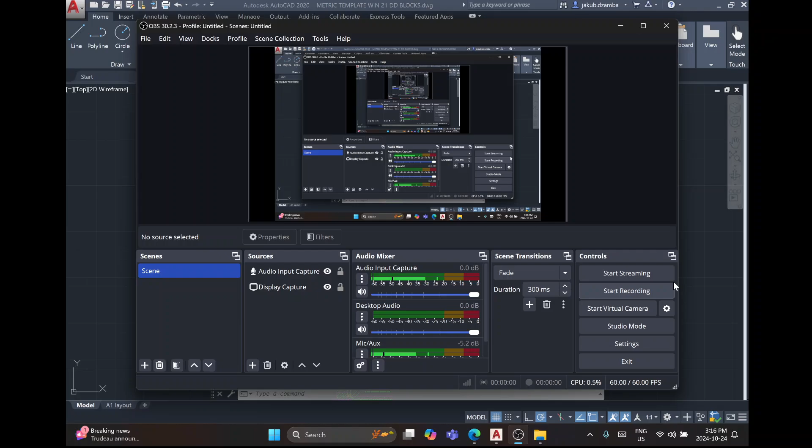Okay, so more or less I believe this is where we left off before finishing up the assignment. So we have our structure in place, we have some of our cladding already in place, kind of the sandwich of layers, so studs, plywood, insulation, air gap, exterior cladding, and so on. So next what we need to do, let's grab this.

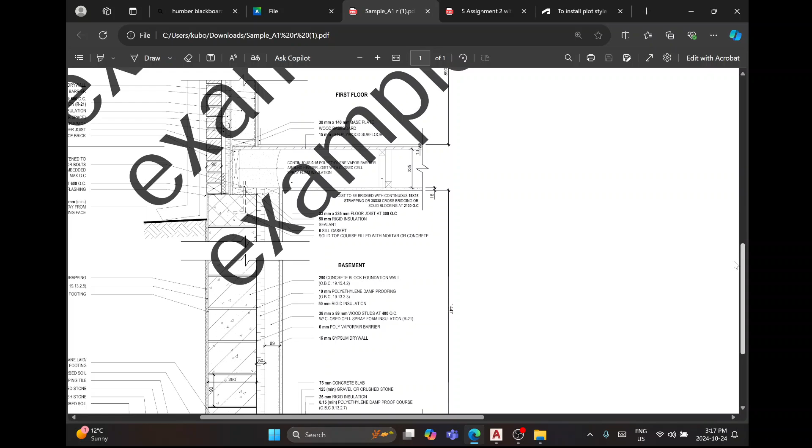So we need to add a couple of things, I think we have most of the detail we need actually. Let me just check here. We need to add some stuff like flashing and things like that. So let's zoom in on that for a second.

Right now we're at the base of these blocks here, and so what I can do is grab the flashing layer. There's probably some kind of layer I could use for that. Let's see here... glazing, roof, furniture, no. Pattern jam, a wall jamb, not really. Maybe external, what else do we have? Roof glazing furniture, door annotation. Sure, let's go for a wall. Not internal, exterior, there we go.

And so here I'm just trying to show this profile. It looks like it starts somewhere at the top of that second brick, goes down vertically, then stops at the bottom of that brick, and over the course of that 10mm mortar joint, it zeroes itself out to the bottom of the mortar joint and creates a little drip edge.

So what I could do is just draw it like this for now. Let's see what that gets us. And now maybe I want to move this thing, all the way to here, but not quite. I want to move it maybe 5mm off, so something like that. Grab this line, extend it to it.

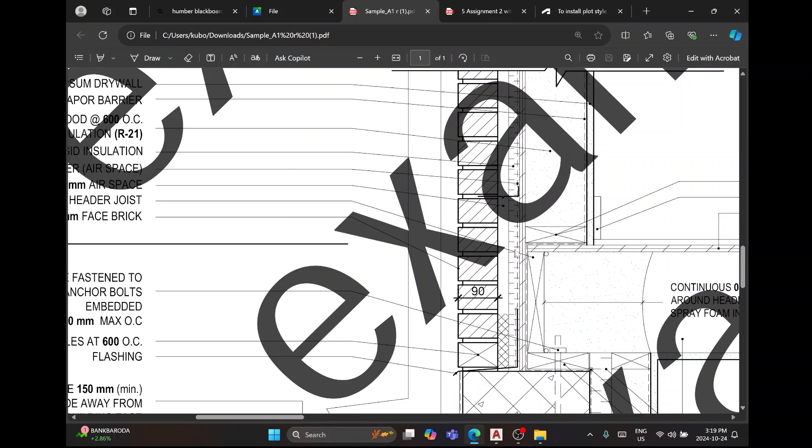So now we have this profile here. Next we may want to put this dashed line in, which indicates an air vapor barrier, but we don't really need it because we have spray foam insulation. No, it's construction paper, okay, yeah, we want to protect that plywood a little bit. So we're just going to create a dashed line that goes around the perimeter all the way up from the plywood, and here it terminates at the second floor, top of the stud wall.

So let's go offset 5. I'm just going to offset this line a little bit more. So I've offset this line, now I can make it dashed if I want to. So properties, line type, let's go dashed.

Close. I guess the person on the drawing is showing it go around this profiling. If anything, it would go behind it. So we're just going to leave it, we're going to let it go right through it. That's fine.

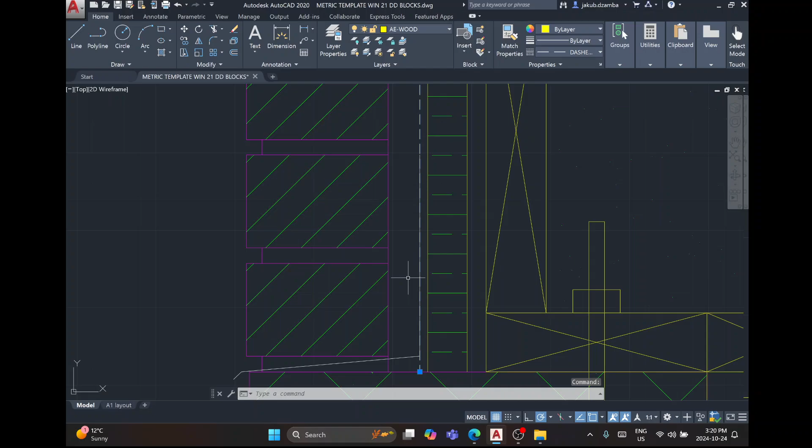Okay, so now we need to offset. Oh, we have it on the outside of our insulation, I don't think we want that. Oops, wrong thing. Yeah, they have it on the inside of their insulation. What are they doing down here? Yeah, it's on the inside of the insulation, and I guess so is that flashing.

Okay, so let's move all of this in a little bit. So move, I'm going to grab all of these pieces, except for that end part, I'm going to leave that where it is. And I'm going to move this from here to here. Extend this guy all the way out to there.

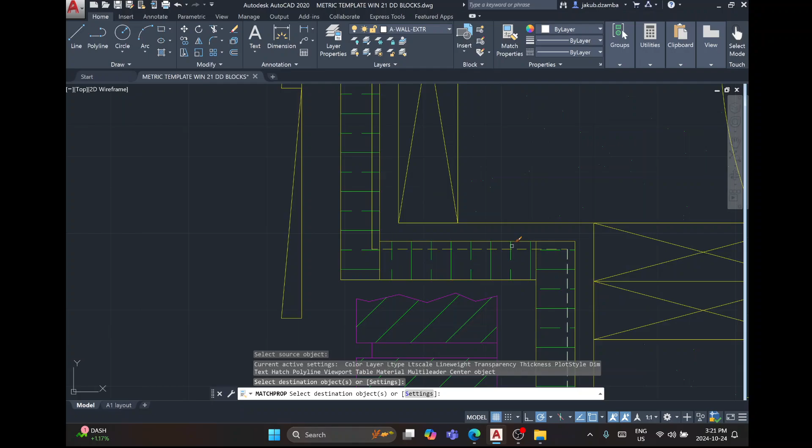Good, now we have this dashed line, and we can simply continue. So offset 5, here and here, and I'm going to fillet it. Okay, match the properties on it.

And we're kind of there, we just have to get up to here. So let's offset by 5 millimeters. How far do they wrap that? Oops. Sorry, my zoom function is kind of messing up on here.

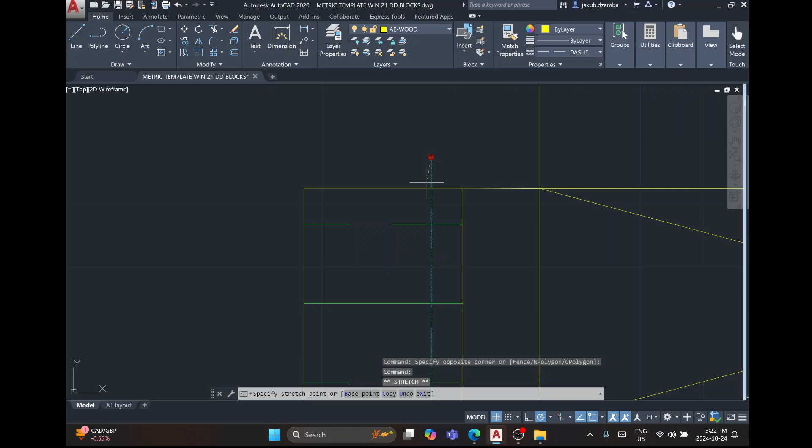You bring it all the way around, I don't think that makes any sense, so we're just going to stop it up there. Actually we're going to stop it up here. So fillet here to here, you can pretty much delete that. And actually we didn't even have to offset, we're just going to stop it right there. Okay, so we have that done.

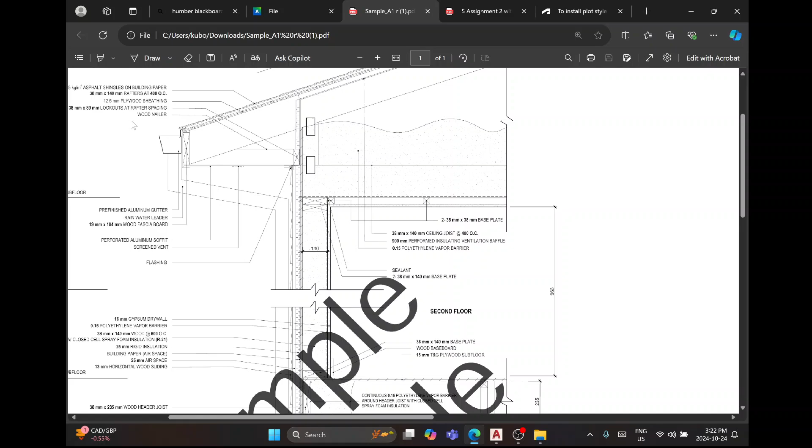How are we doing on our attic eaves here? Looks okay. We want to draw in our little bit of flashing with a drip edge in here, our eaves trough, and maybe some of our shingles with a waterproof layer.

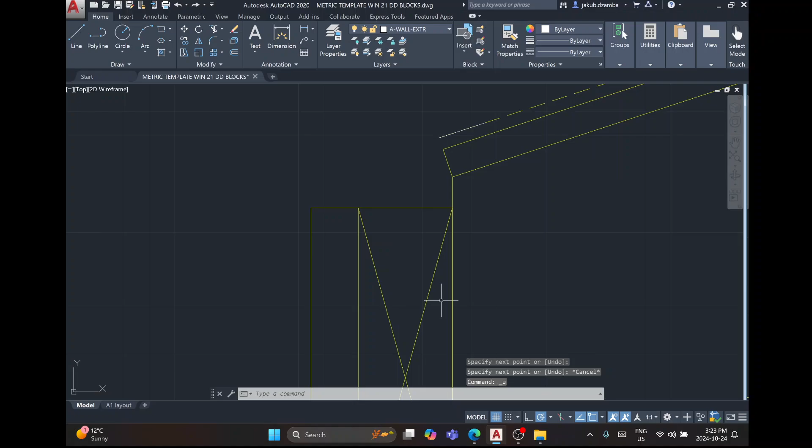Okay, so here we can go offset 5. Match it to that, you can zoom in. Kind of copy that line to create... actually no, that's not where our eave is going to go. This plywood heads right over top of that header there, so we have to bring this a little bit further down.

Let's bring this to there. Delete that. Extend this guy to there. And now we can do our drip edge.

Looks like it wants to start somewhere here to about... well, we shouldn't guess like this. Okay, so offset 5. Oops, that's not what I wanted. Okay, so let's say from here, offset 5, like so.

Let's offset, we'd offset by 20, something like that. And we're gonna go from approximately here, extend, just want the same angle. Extend that piece to there.

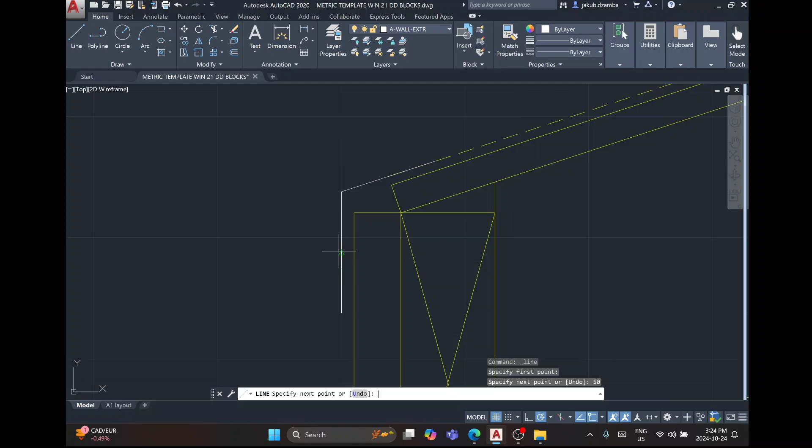Now I can delete those, I can delete this. And I can extend this one down, let's say, for 50 millimeters or so. And here I'm going to give it a -5 drip edge.

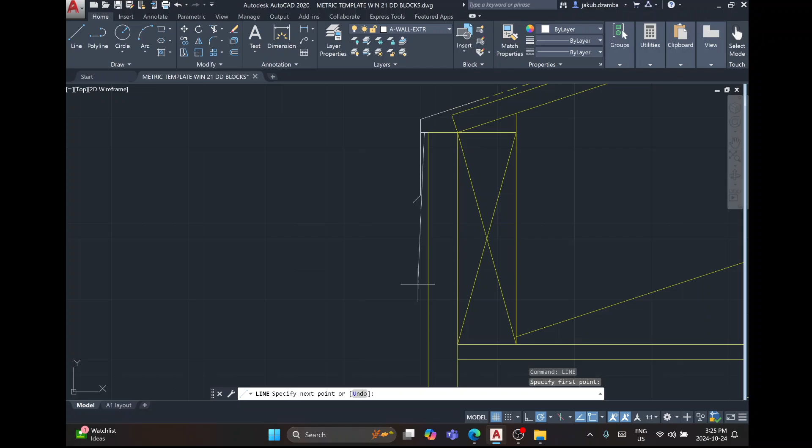There we go. Then I'm going to do an eave trough. Maybe I want to get that line between my drip edge and that piece of wood, and the eaves trough - I don't know, let's say we'll make it 150, so -150. Oops, wrong way.

150, how deep is that? Sure, it's alright, let's make it 100 wide. Kind of has a U shape there. So if it goes up, I'm going to guess that it goes maybe 30 back, so I'm going to say -30, 100.

There we go. Now we need some shingles on this roof. We could probably just grab these guys that we have here, just gonna grab a whole bunch of them. Just like that. Control C, Control V.

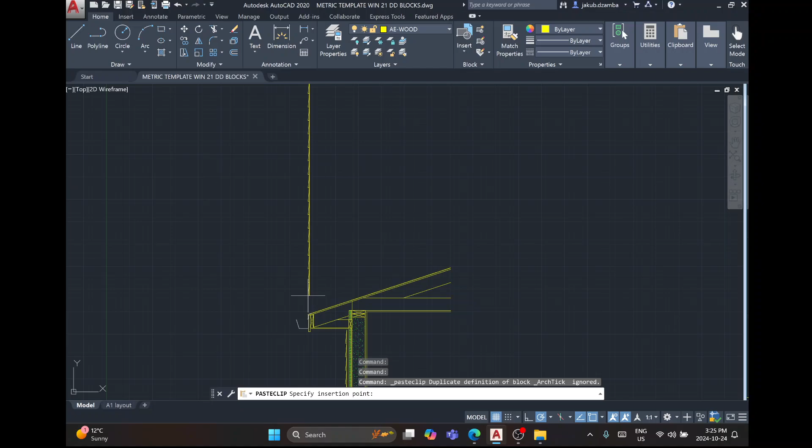I'm gonna plunk them up here. Actually, no, maybe I'll put them here for now. Now I'll hit move. Okay, and let me just see here. Sorry.

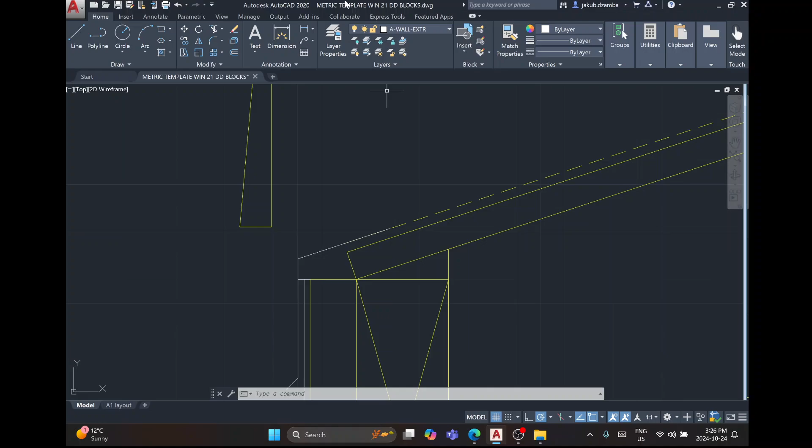I'm gonna offset this by 5. Okay, temporarily. Move this, all of this.

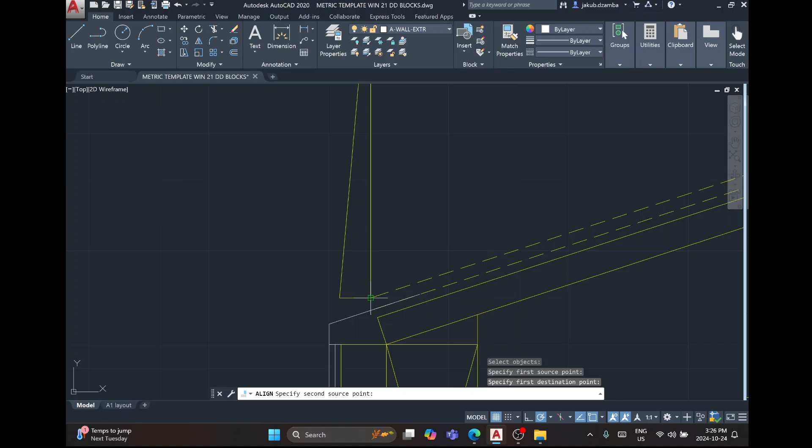And there's a bunch of ways to do these shingles, you don't have to do them the way I'm doing them. And now I'm going to say align. It's going to say select the object, so I'm going to pick all of these objects, okay. Specify source point here, specify destination point here. Specify second source point - I guess that would be up here. Second destination point. Oh boy.

I don't know if I did this right. And then just hit enter. Scale objects based on alignment points? No. And so now it just kind of aligns that for me. And so now I can kind of delete the extra pieces that I have here. And I got my shingles.

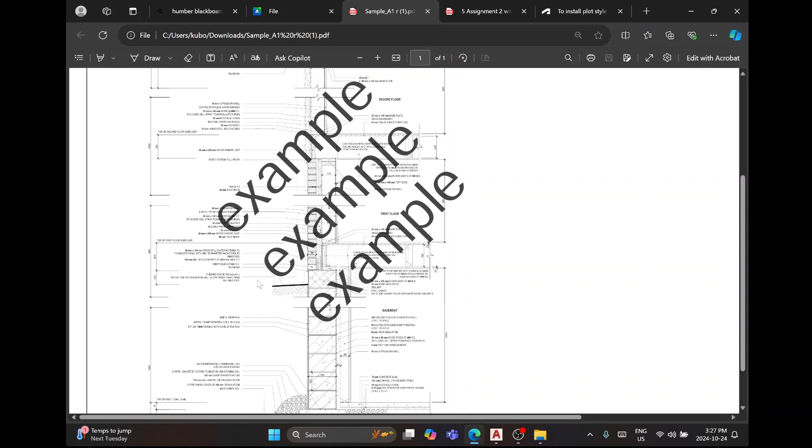Okay, so we look pretty good. I think you guys probably know how to draw the rest. If there's any last little bits, maybe we should draw this piece of floor, piece of ground level in there.

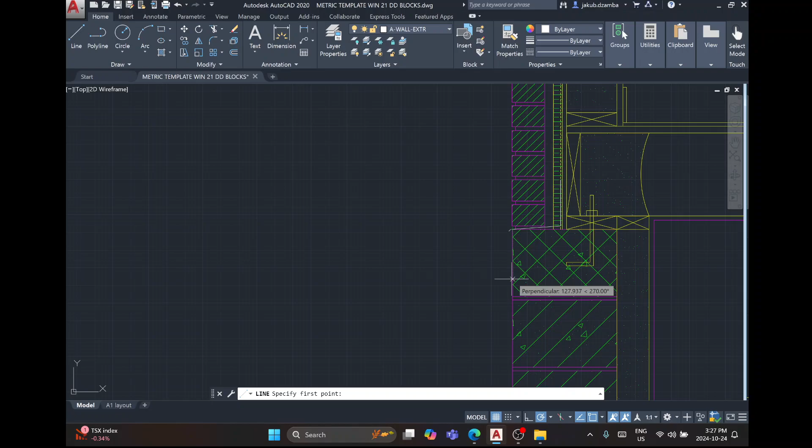Oops, again, wrong thing. Okay, so it's most of the way down the block. So we go here. This you can kind of eyeball. It's ground level, right? So we're gonna take it out.

Oh, I don't know, let's say up to here. And we'll drop it just a little. You want the soil sloping away from the building so that water leaks away from it.

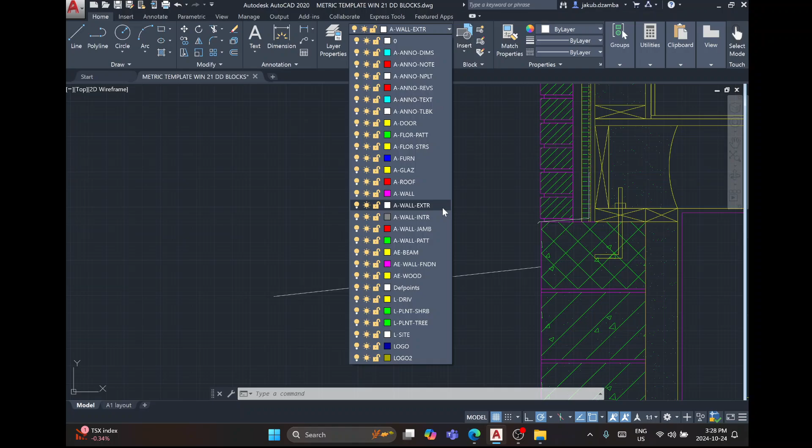We have a landscape, shrub, landscape, driveway site. Well, we don't want that. Let's leave it as, okay, whatever, landscape tree for now. Okay, so we've got that.

They have a little bit of hatching underneath it. So we could draw a temporary little area to shade.

Okay, switch to our wall pattern layer. Hatch. Pick our soil hatch. It's usually under E for earth. There we go.

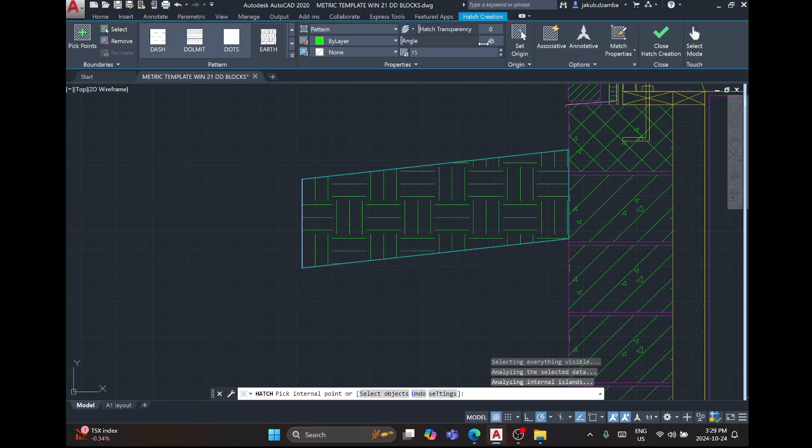Okay, let's give it a bit of a bigger... yeah, it looks about right. Give it an angle, usually they have it rotated 45 degrees. Done. And now we can kind of delete this temporary boundary. There we go. Okay, so I trust you guys know how to do the rest of that.

Now for annotation, let's switch to anno note. So I can go to my little arrow here and click and point at stuff. So I could say, for instance, here - this is how much? 175. Oops, how much?

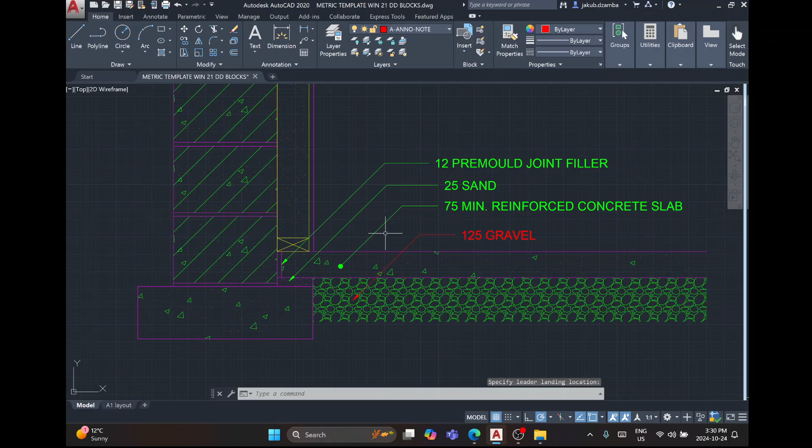125 minimum gravel. Okay, let's set that to 125, caps lock gravel. And now what I can do, if I want to line it up with these things, I can kind of just grab that handle and move it back. And this one, if I want to line it up, I can just do that.

Now alternatively, if I want to just do a list of stuff right through, I can go to one of our walls, like here, and I can just draw a line right through, go down, and take the text function.

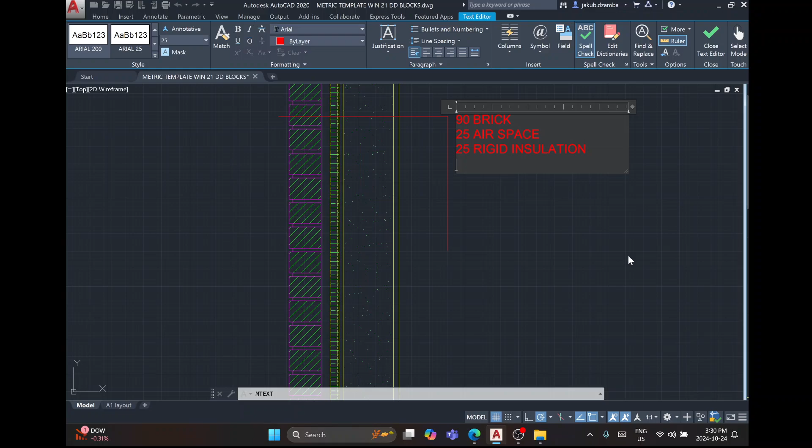And I can just start listing stuff going through the wall. So I can start with like 90 millimeter or 90 brick, 25 airspace, 25 rigid insulation, what do we have, 1/2 inch plywood, so 13 plywood, 140, spray foam insulation, so 140 studs at, I don't know, 400 O.C. How do they write it in the examples we have?

38 by 140 millimeter wood studs at 600 on center with spray foam insulation. Okay, so 140 studs at 600 on center with spray foam insulation.

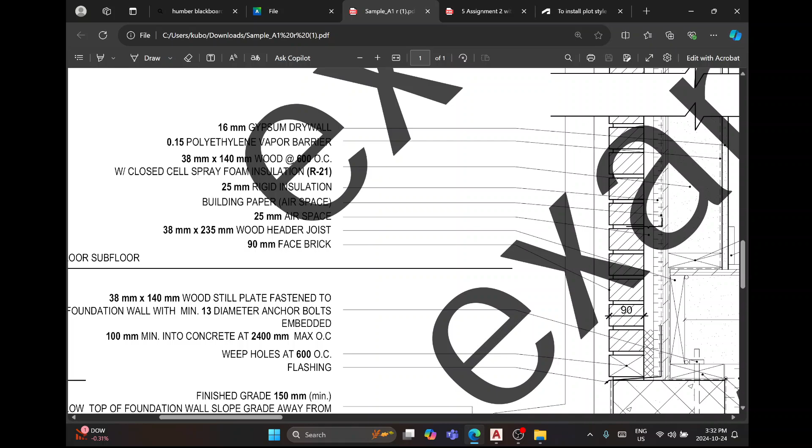Nice, okay, 16 gypsum wallboard. What do they list for this dash layer? Building paper, okay we can see the same thing. So we've got right here building paper. Okay, and so that kind of gives us a list of stuff that we have in this wall. Where's our gypsum? There we go, gypsum wallboard. Building paper has no thickness, so we can just leave that, and that would be our note for the wall.

Okay, so you can either do notes that kind of point to stuff like this, or you can do notes that go through things like this.

Now the next thing we need to do is create datum lines. And they're going to go from the finished floor elevation, so the plywood, not the joists, but the plywood that sits on top of it. So for that we can just go out like this.

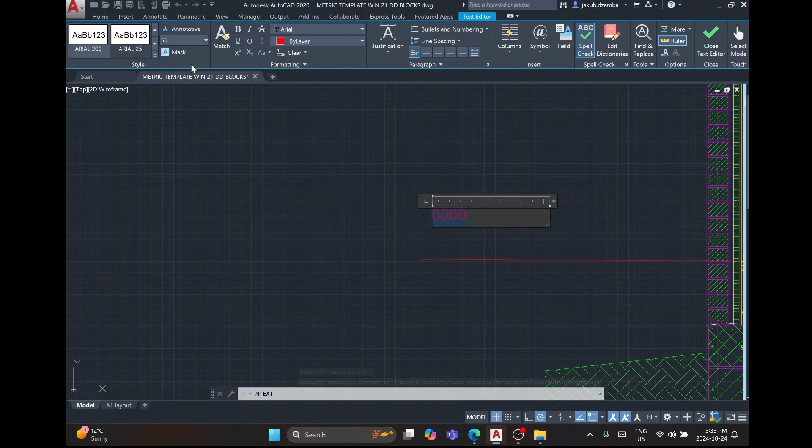And for now I'm going to grab some text. Okay, we're going to go 0, 0, 0, one more 0, there we go. Let's make it 50. There, circle. I guess that's pretty good. Maybe we can make that a teeny bit bigger. Extend this to there, trim.

Okay, done. And now I can copy. Wait, hold on, I need to get some text going here again. Ground floor FFE, so finished floor elevation. Okay, and so now what I can do is I can say copy.

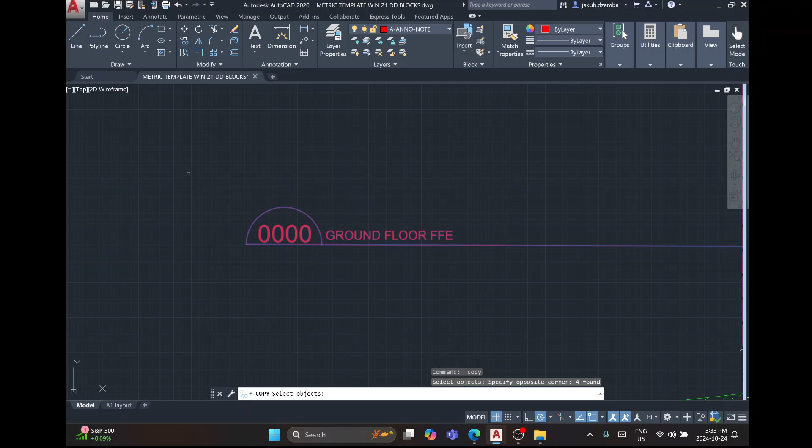And I can, oops, for some reason it's not lined up. Right there is where we want it. Well, what's going on here? This whole thing is, okay. No, this has to be, this line is off. That's what's happening. Our building is for sure fine. Yeah, this line was just, I drew a diagonal, a line that wasn't straight for some reason.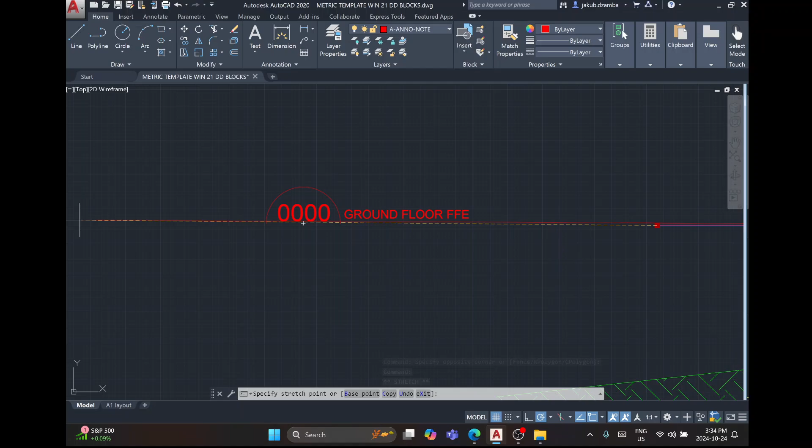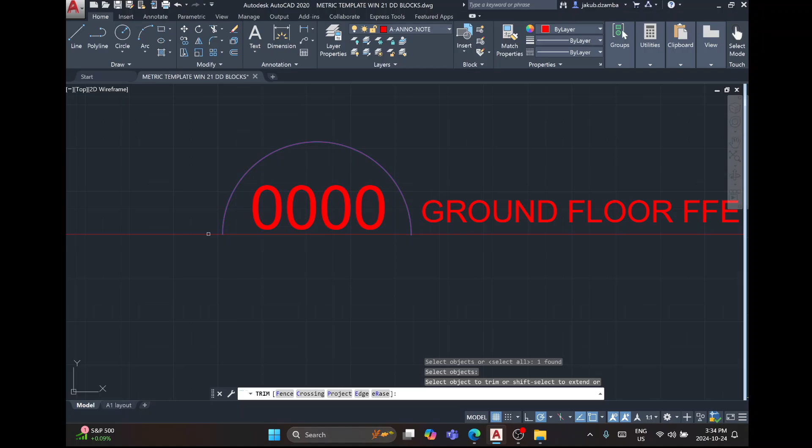So we're just going to extend this, you know what, extend. There we go. Okay, moving on.

So let's copy this. So from there, we're going to copy it to the second floor finished elevation. And here we're going to go to the top of the roof rafter, ceiling joist. Right there. And here we're going to go to this floor.

Now we generally want them to line up on the left, so I'm just going to take this one that doesn't line up and extend it to here, and then move that line to here as well. There we go. Okay, so now we can put our dimensions in.

So I'm going to grab our, we can switch to dimensions if we want, anno dims, grab this, and I can go from here to here. There's one dimension. Zoom in.

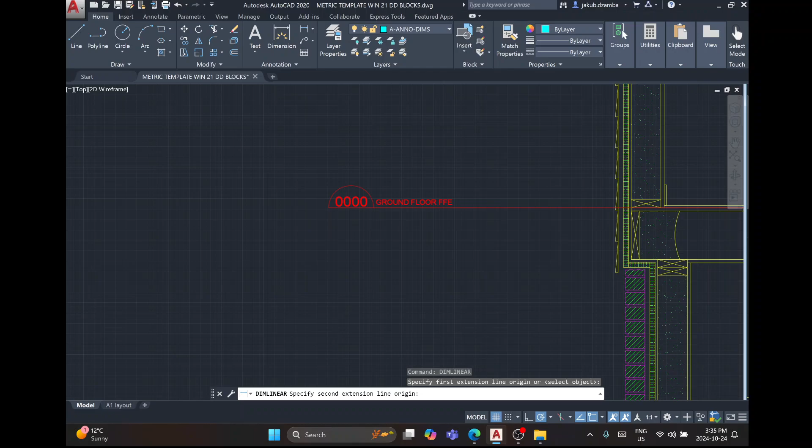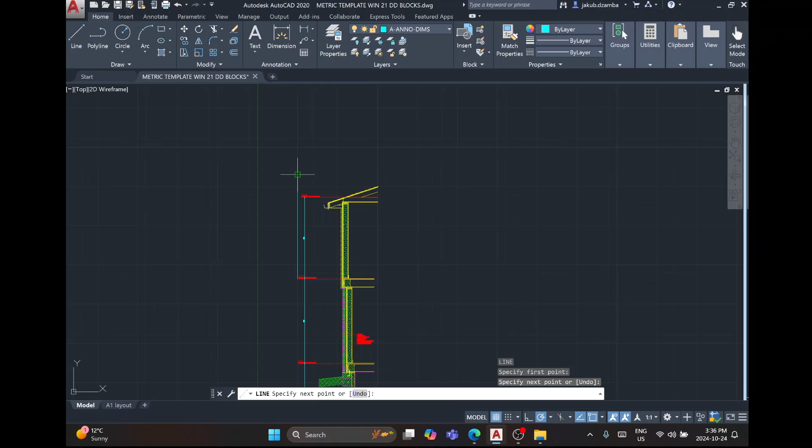There to there. Oops, what did I do here? Okay, just up to there. Okay, found another spot where it doesn't quite align. There we go.

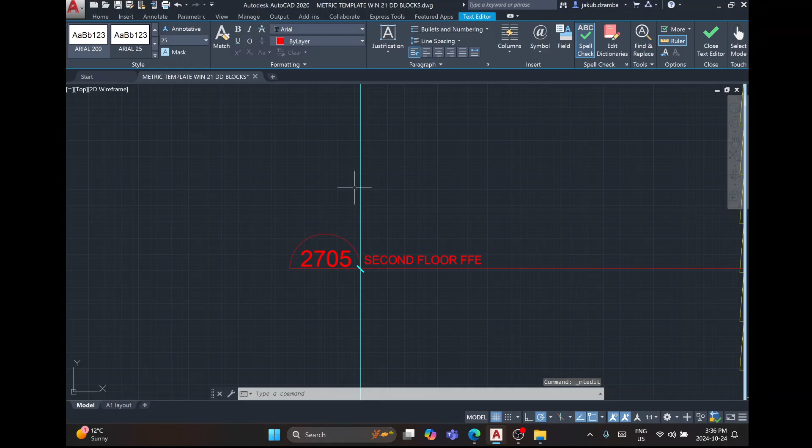Okay, so we know that this is 2705 above ground level. So 2705, second floor FFE. Now 2705 plus 2597, come on, that's 5,302.

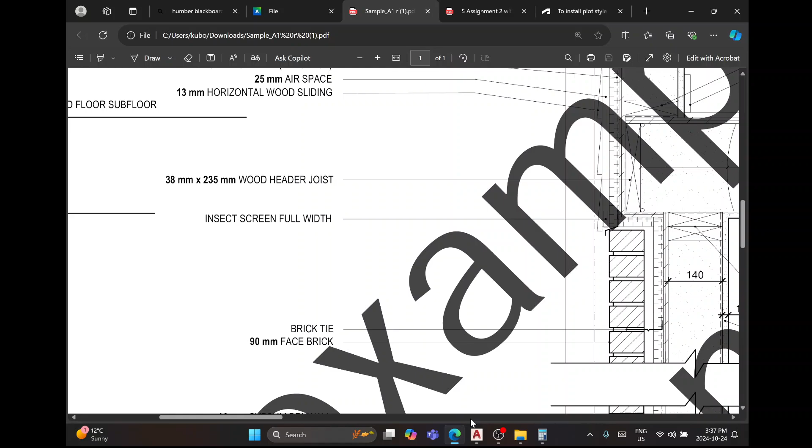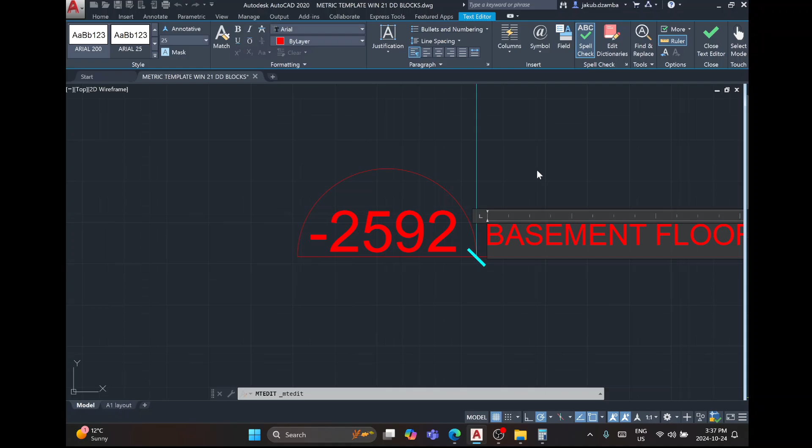How did they even... no, they didn't do the datum lines in here, okay so we're doing these on our own. That's fine, and this is 2592. So all we do here is we just put a negative in front of it, 2592. We can move this a little bit to make it fit, and we go basement.

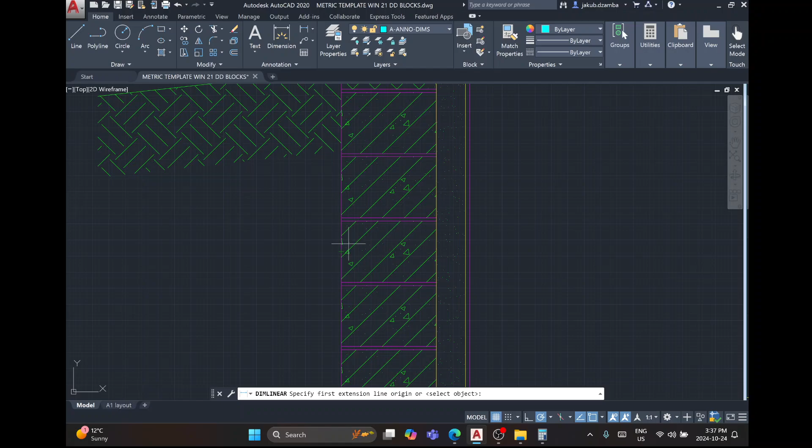Floor FFE, okay that's good. For additional, so now you know how to do the datum lines and some dimensions. Now for other dimensions we could do, we could show this dimension. So I would just kind of go around and dimension stuff where it makes sense, so for instance through this wall, let's say we want to do a few dimensions in here. Okay, you could give the overall dimension, for instance.

Okay, this wall is 308. So let's say we put it there. So I want to put that dimension outside just so you can see it. And then I could, if I wanted to, I could show some subcomponents. Maybe a bit close, let's go here.

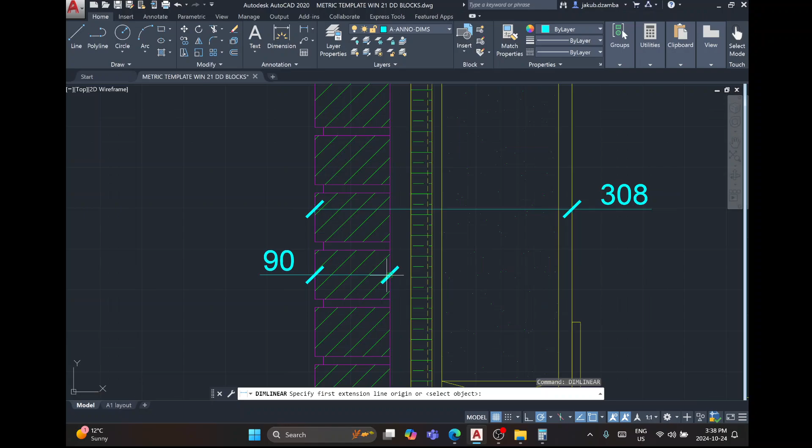Okay, so 90. Now that hatching again might kind of get in the way of the number, so I could show a little bit here if I want to. Is this 25? That's going to be too small. We know it's a 25, we can read the note anyway and see all these things. But you could just label the major components. That can stay like that.

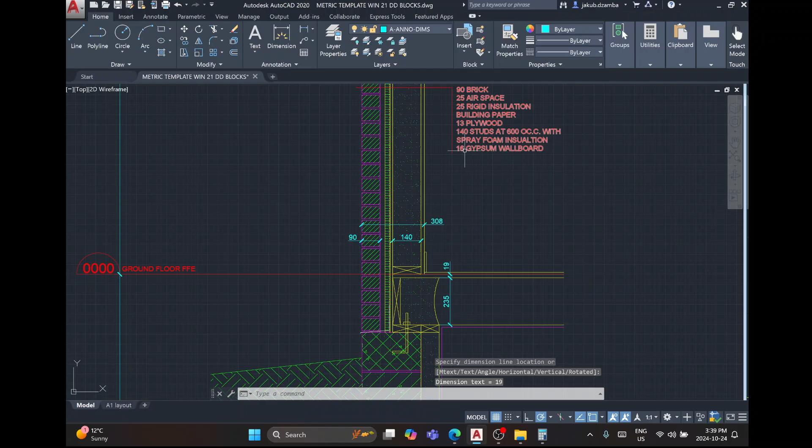And so on, here we could kind of give this dimension. Should be 235, there we go. We could show the depth of the subfloor. Oh, we did 19 millimeter. So see, now I can go back to here. Oh no, we didn't do that floor. Okay, so 19, and this is, we could, if we wanted to, show that it's 3/4 inch plywood.

And so now what I can do, if I want to, I can go to my notes, go through it like this, and do a note. Now it might be nice to have the notes align, so maybe what I'll do is go a little bit back like that. Maybe this stuff can come a little bit forward, kind of like that.

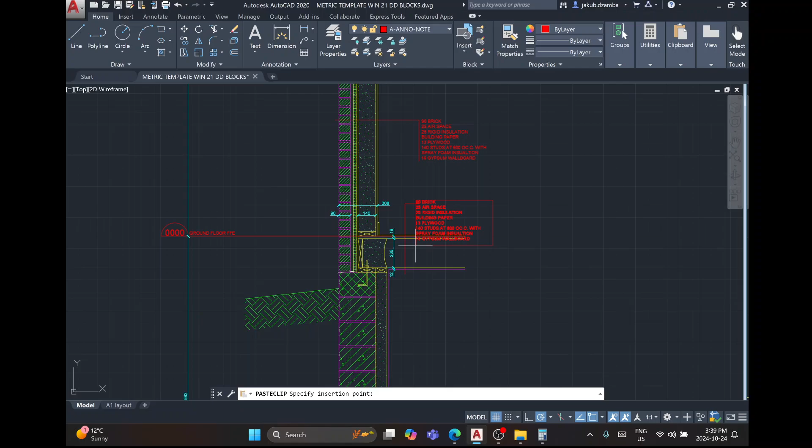Just copy some text in here so I can get started on this. Then we can say something like, well what do we have? 60, so 12, gypsum board, 235 floor joist, 19 plywood subfloor, and that's it.

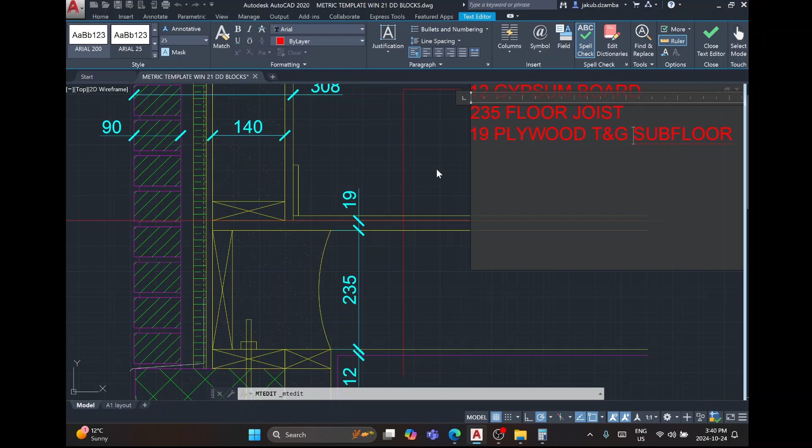Let's see what they do. I just want to make sure I'm not giving you... well that'd be tongue and groove plywood subfloor. Sure, we can put that in there. You can just say T&G, or you can write the whole thing if you want.

Let's check on the old school example, these are usually better for notes. Joist to be bridged with continuous 19 by 64, so we should add a note like that as well. We can just say blocking, or 38 by 38 cross bridging, or solid blocking at 1200 on 2100 on center.

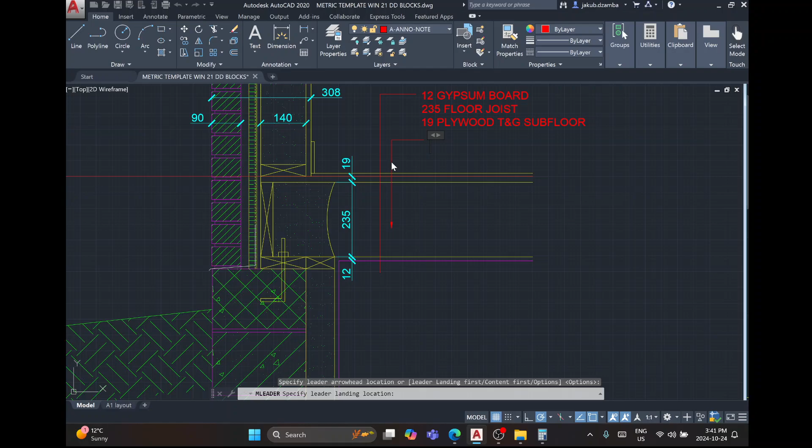Okay, so let's add a note. Bridged with continuous 19 by 64. Or 38 by 38 cross bridging, or solid blocking at 2100 on center.

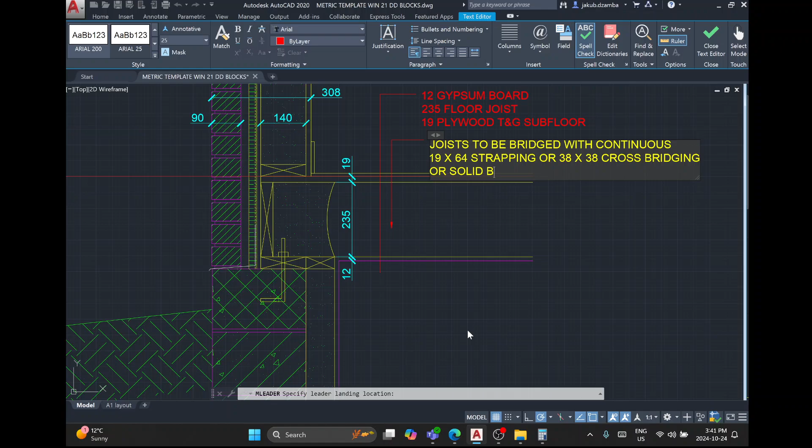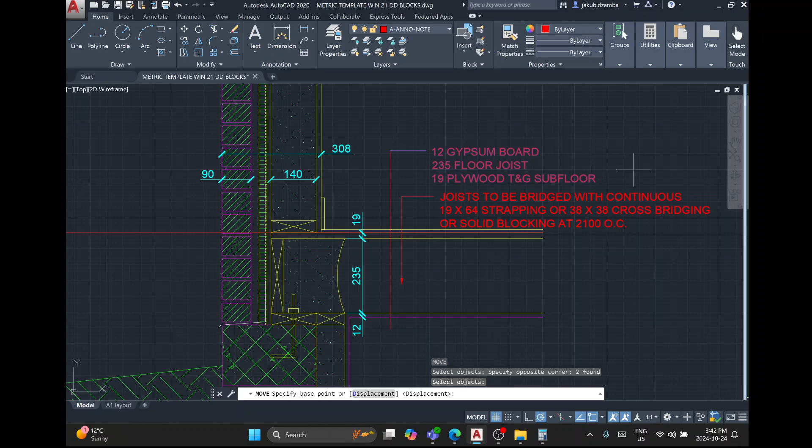So maybe there's not enough room. What I could do is move this note up a little bit. Okay, this could now come up a tad, maybe I'll line that up with this.

Okay, this I can change to a dot because it's not really pointing, it's more sort of touching a thing. So I could say close dot. Arrowhead 20 is a little bit big, so let's maybe try 15, make it a bit smaller. Pretty good, alright.

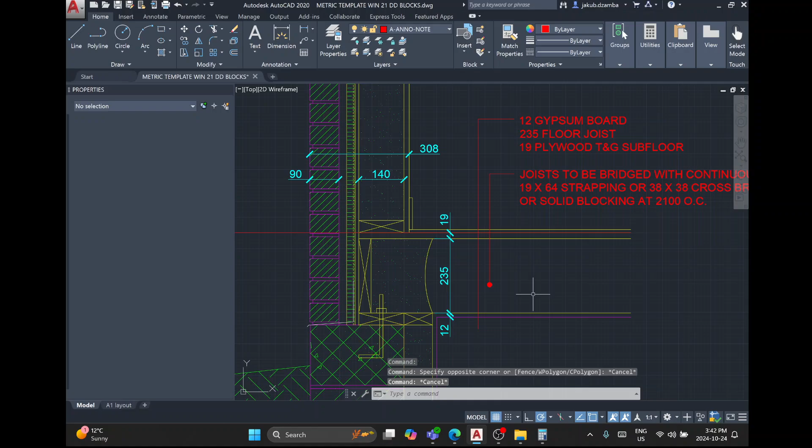So you can start to add notes and dimensions like this, and then we need to do our layout. So in here, this is our layout. Oh good, we're recording, okay.

So here you can first of all update your stuff, so 2-story residential, we can just say 2-story residence. Address, you can make one up or leave that as it is. Drawing sheet, drawing name is going to be wall section. Drawn by, please add your name there. Assignment 2, good. You can update the date if you want, you can say, what are we at here? 24, 2410, 2024.

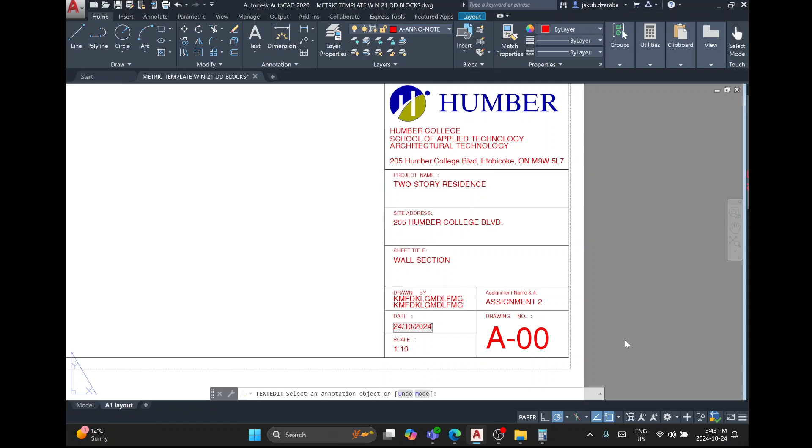Scale 1 to 10. Normally the wall sections would be a different number, they'd be like A10 or 12, but since these are first drawings, we're just going to follow the format and say A01.

Okay, so here we can type in viewport, single, and we punch in a viewport. We can make it as big as we want, even the whole page if we want.

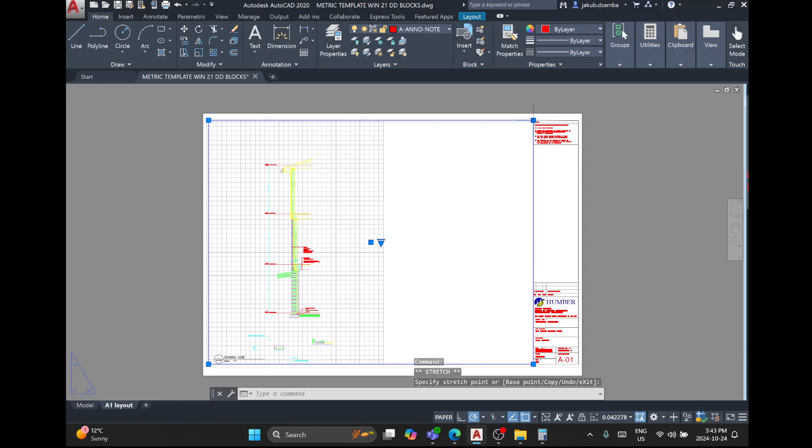Now if you double click into this thing, you can move around and zoom in on your drawing. If you click this grid symbol here, it'll take the grid away. And now we want to say 1 to 10, that's our scale. So you can see we don't have enough room.

But what we could do is shrink this down a little bit, let's say to here. Copy, and we make another viewport somewhere here, and make it a little bit bigger.

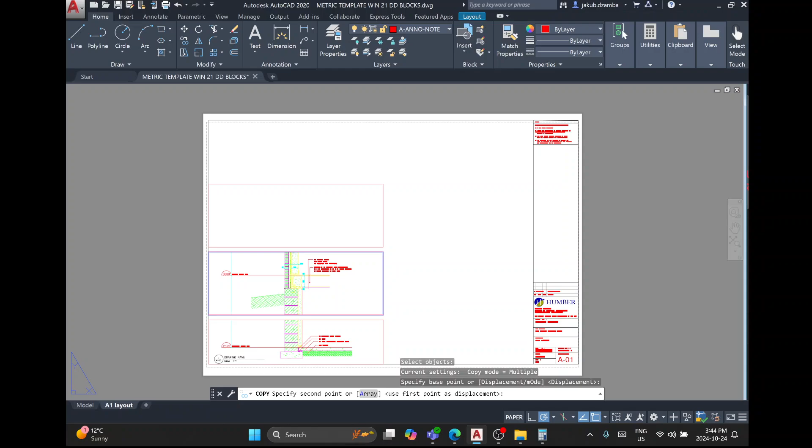And we just move down to the other interesting part, right there. Copy again. Move down to the next interesting part, which is right there. Copy one more time.

And this one we're going to need some space for, so maybe this one we actually shift down a tad. We don't need as much space there. This one we're going to need to show our roof on.

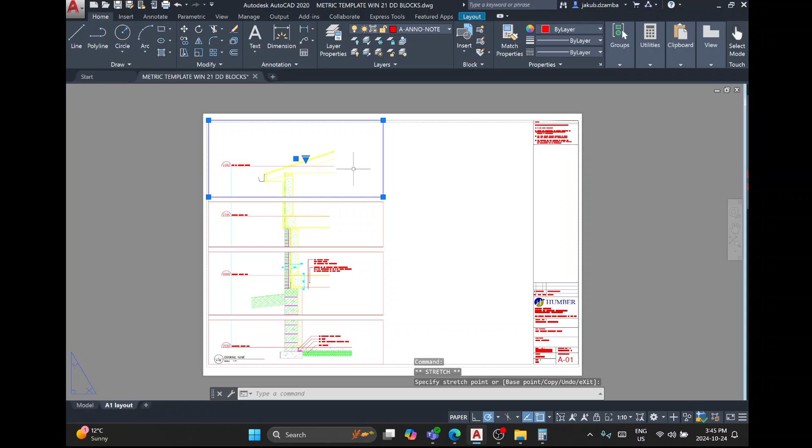Okay, and now if I want, I can just kind of fill out the rest of the space. Maybe I want more stuff here. You can stretch these out however you like.

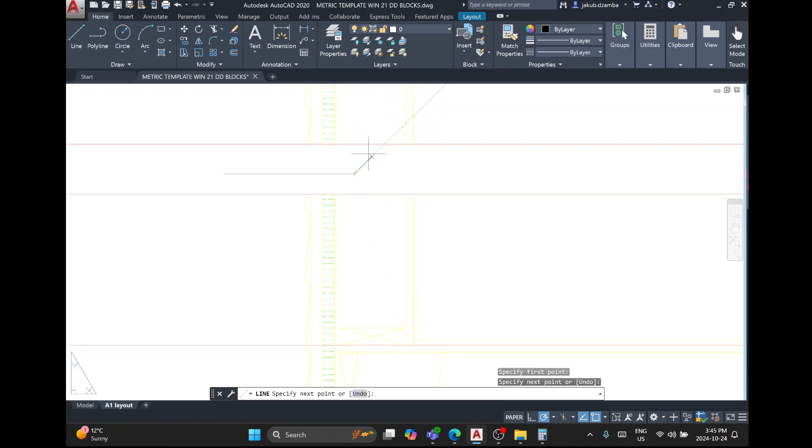Now for the breaks, you can just go in here, grab a line, and build our own break for a second. I'm just going to freehand it. Make sure this is approximately the same, approximately symmetrical. There we go.

Okay, so now I could move that up to there, and I can just copy it throughout if I want. Since they're spaced evenly apart, I can just grab both now and start doing this.

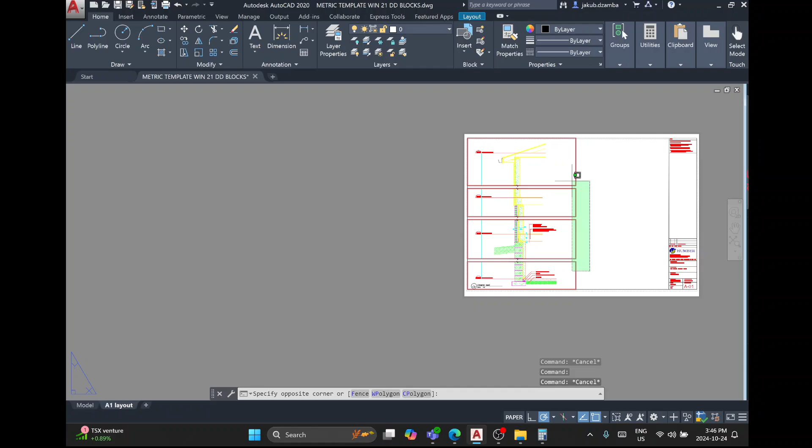There we go. Now what I could do is put this all on a viewport layer, so I'm going to move this. Oh, we don't have a viewport layer, so let's go here, new layer, viewport. Good. Now I can move all of these to my viewport layer and then turn off the viewport layer.

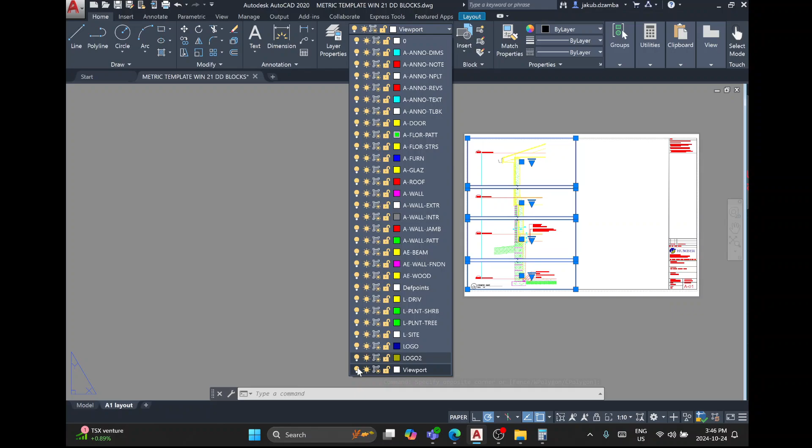And I'm just left with my break lines. But you can see a little bit of an issue where sometimes the break line bleeds past where it should, or it doesn't show stuff where it should on the break line.

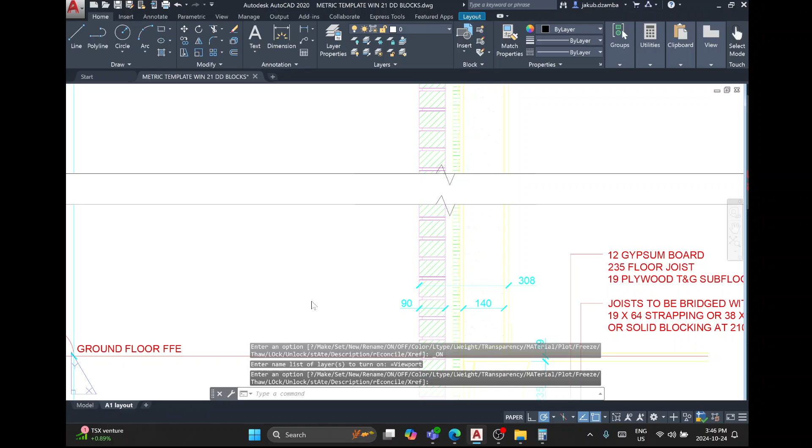So I'm just going to go back to my viewports for one more second, and I think there's a function here where I can say viewport clip, select clipping object, polygonal. So let's go polygonal, and here I basically just follow the outline until I get to my zigzag, and then I go through it like so, and right click and say enter.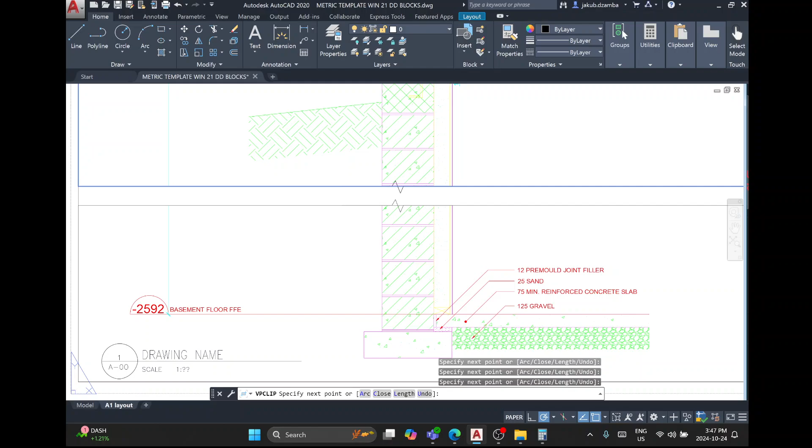Okay, it didn't show there, but let's see here on this one. Okay, now you can see it kind of cuts that part out, bleeds it further here, and then gives us what we want.

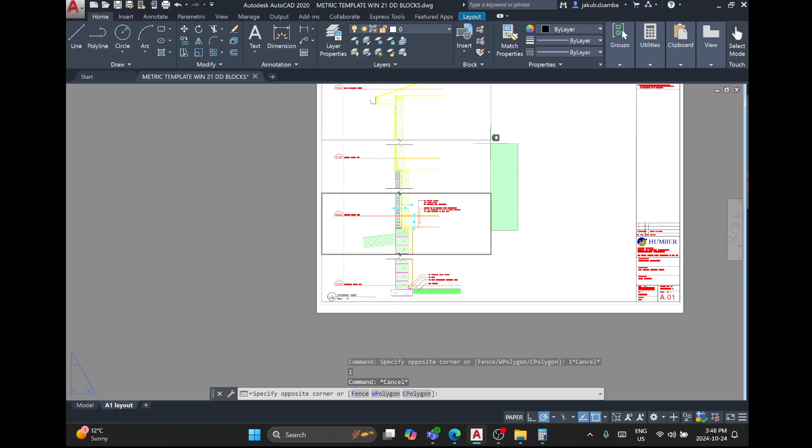So when I'm done that, I can just click here and say turn those guys off, and we're looking pretty good. Oops, what's with these guys? Get them on the viewport layer. Okay, and now here I can just say 1 on

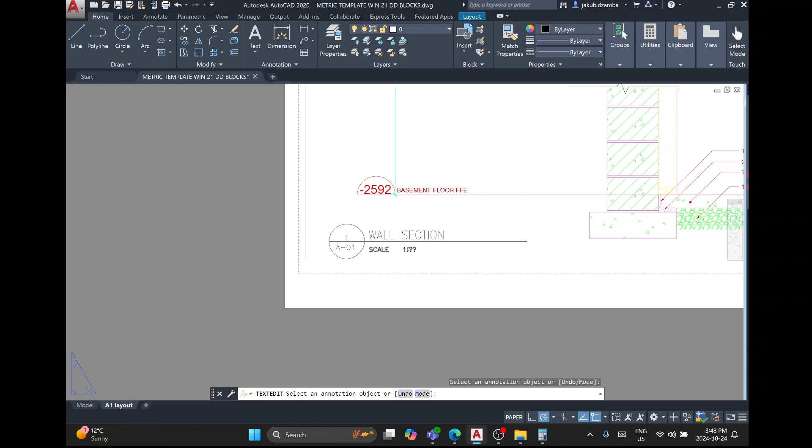A01, wall, caps, wall section, scale 1 to 10. There we go, enter. And now the last thing we need to do is get ready to print.

So I'm going to go here, right click, page setup manager, modify, and here we're going to go through it one at a time. So here I'm just going to select - on my personal computer I have this Adobe PDF thing, but you're going to pick any PDF thing you have. I think you guys should all have the PDF high quality one, AutoCAD PDF high quality.

And then for your page size, you're going to want ARCH 36 by 24, not the other way around. For layout, let's switch it to window, and now just go from the furthest top left point to the bottom right corner. Make sure to click center plot. This you shouldn't have to mess with much, just switch it to millimeters. It should go 1 to 1 and hit OK.

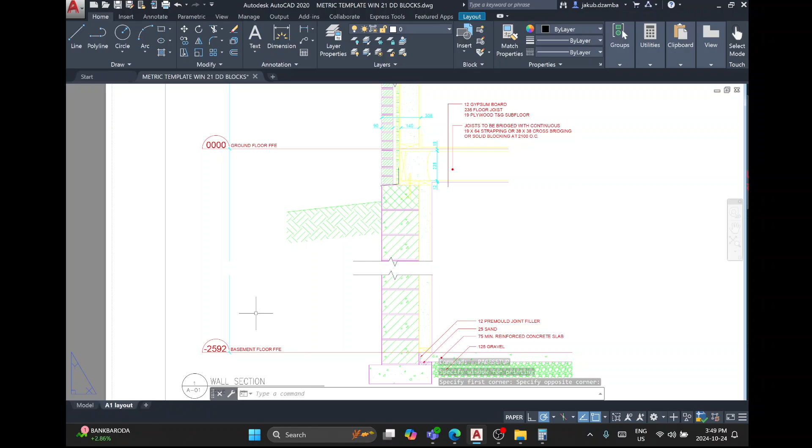Okay, perfect. Now we have one issue where our dimensions and stuff here are kind of conked out, so you may want to move the dimension up or down appropriately. Come on.

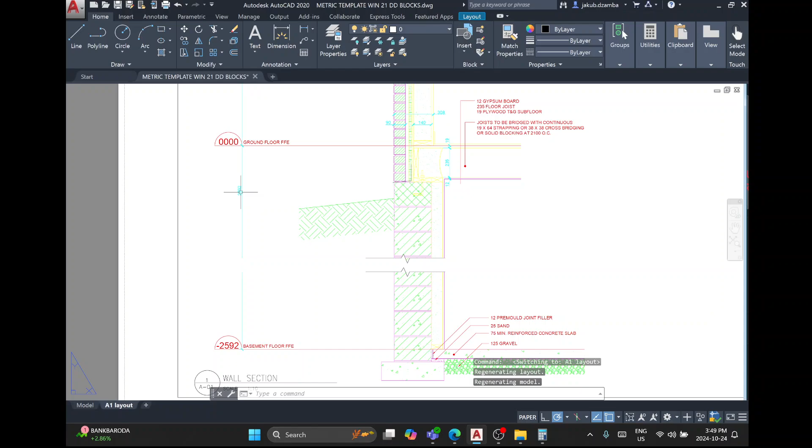See, so just make sure they're visible. Okay, so now if we were to go plot, right click on here, plot, we should be able to preview it. What do we look like?

Not great. So it looks good, but it's still really colorful, which we don't want. So now we want to switch it to the New Humber College CTB, which is missing.

So what I can do is I can go to the Blackboard website, and I think in the very first lesson, lecture 1, here, New Humber College CTB, download it, show me the folder it's in.

Okay, so now I'm going to copy this, copy, and I think to get to what you need, you have to go to the C drive, Program Files, Autodesk. Now there's different pathways to get to what you want. Basically, we want to get the plotters.

Now sometimes it doesn't show it. I think I want to go to CAD 2020 because that's what I'm running here. Plotters. So I would just say go in here, search plotters. Oh, plot styles, even better. So let's go back, plot styles. What do we got? Good. So now in here I'm going to right click, show more options, paste.

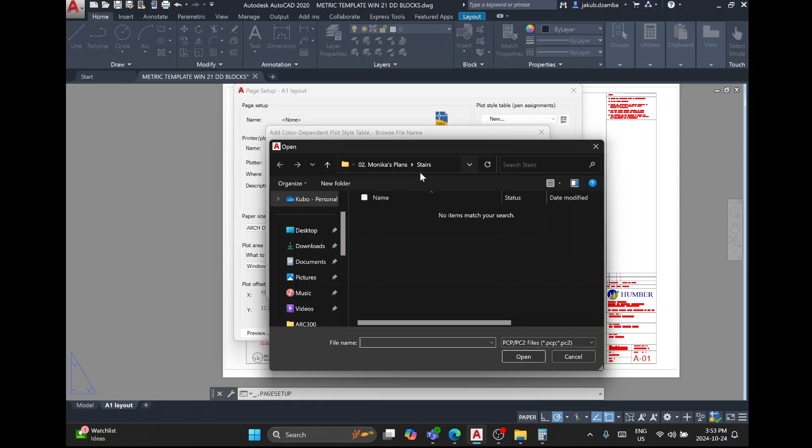Can we do this? No, these are PCP files. We don't have that. Nope.

Okay, let me try one more thing here. I'm gonna save. Close it. Missing. What the heck? Where is this storing its plot styles?

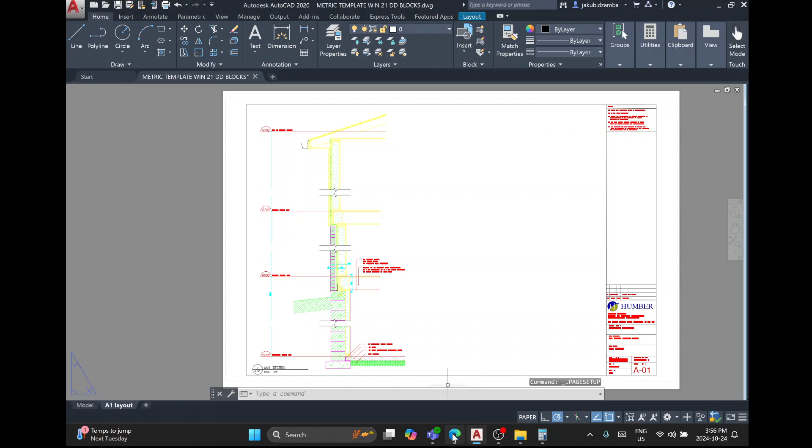Models Properties palette, click the plot style drop down list.

What is going on here?

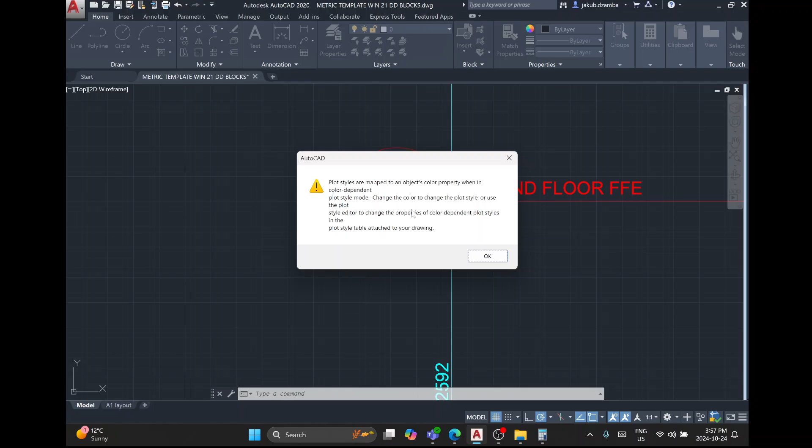Okay, what else can we do here? Go to the properties in the left sidebar. In the model properties palette, click plot style drop down. So why will it not let us do plot style? That's strange, it should allow us. Mapped to an object's color property when in color dependent plot style mode. Change the color to change the plot style, or use the plot style editor to change the properties of color dependent plot styles in the plot style table attached to your drawing.

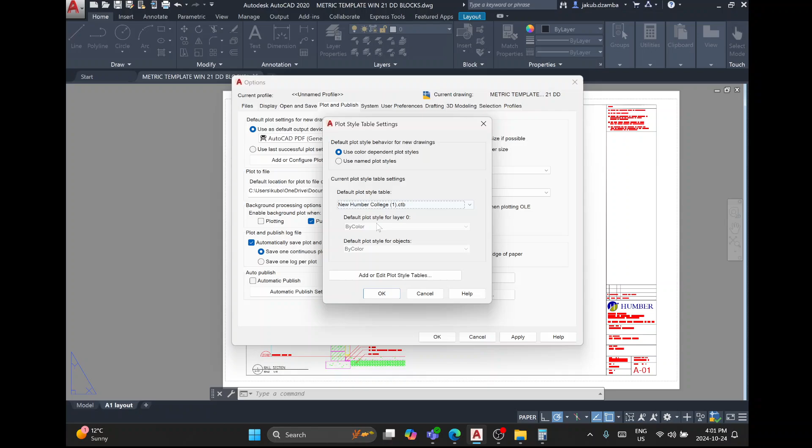It's right there. Oh, okay. Default, sure. I don't know why we're changing it to default, but if that's what it needs, maybe now it'll give it to us. No, still missing. Oh, there we go.

So it finally recognized the new one. Okay, preview, let's see what it looks like. Now we're talking. Oh boy, no we're not.

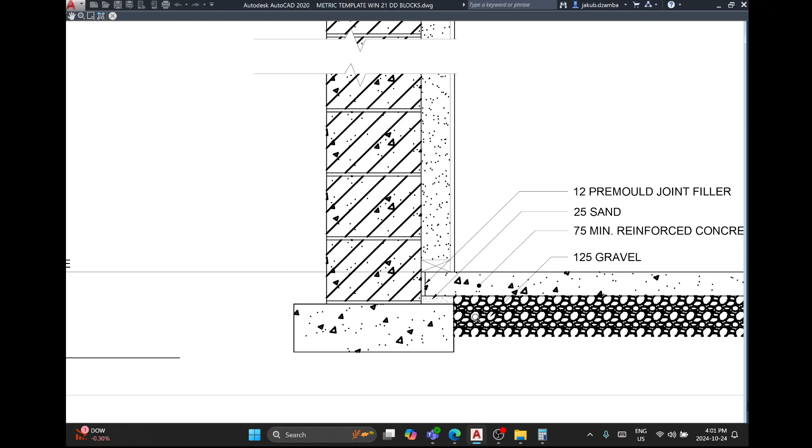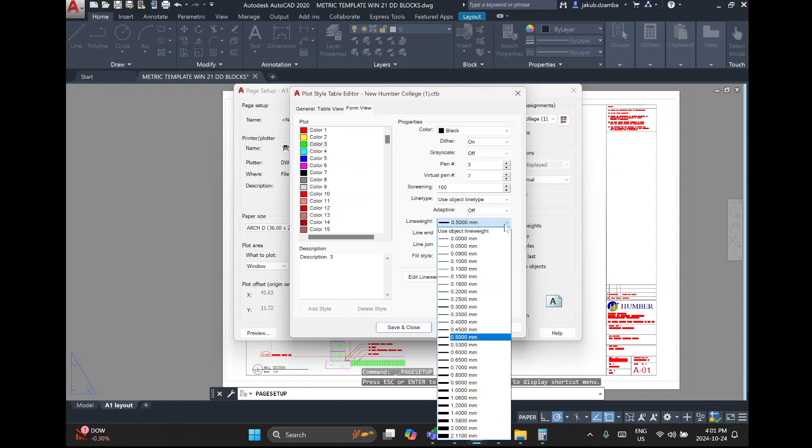So these should be very thin actually. So the one change I would do here, I'm just gonna go ahead and override this plot style table for a second. So I would click on edit. And for the green color, I would change it to something really thin. For some reason it's really thick. I'd go 0.09. Save and close, okay.

Close. Right click, plot and preview. Let's see now. Yeah, that looks much better. See, the other lines are larger, and the hatch is very thin. That's what we want. The dashed lines turned out okay.

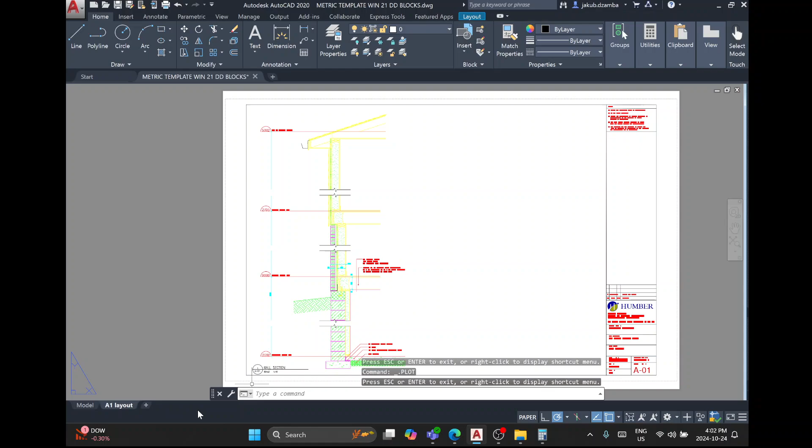Okay, looks good. So that's how you can plot. Now one more time, just that plot style setting took up a lot of time. So what I did there is I typed in options.

Okay. And I went to, it starts you off in something, probably files. Now go to plot and publish. Plot style table settings, add or edit plot style tables.

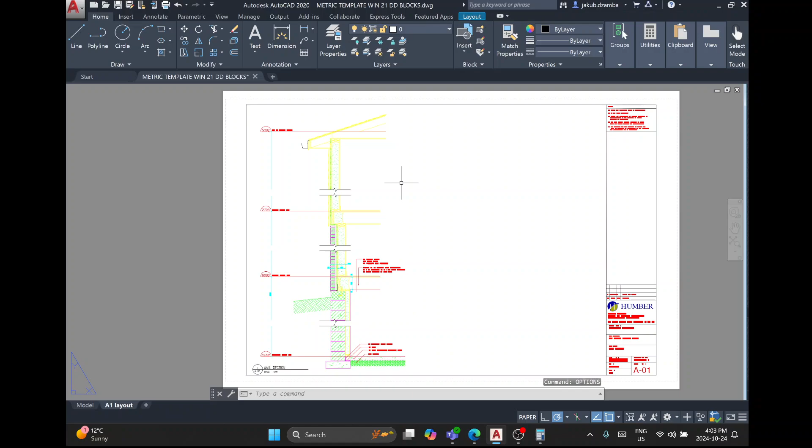And in here you need to drop it in. So from my other thing here where I downloaded it, if I go to downloads, it should still be there. So you could just say, let's say, boy, this is annoying, copy, close that, and in here we could just say paste, but I already have it, so I'm not going to paste it. Okay, and that's it. Thank you very much for watching.